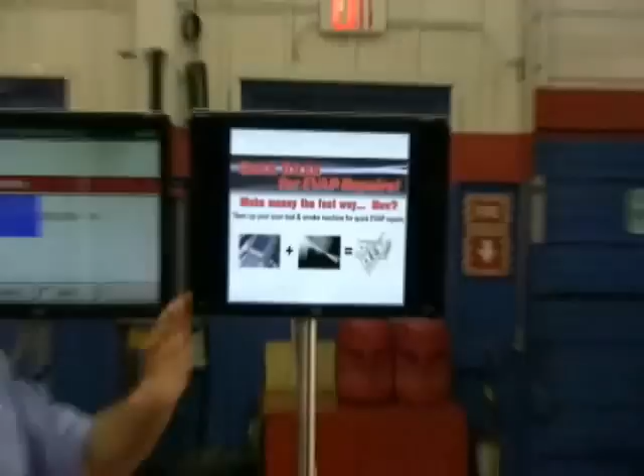Anyway, let's move on here to quick tricks for Evap repairs. Make money the fast way, and now team up with your scan tool. So what we're really looking at tonight, John, right, is using a scan tool. No matter what scan tool. We have a couple picked out here tonight, but it doesn't matter what brand you have, as long as it has bi-directional control. Absolutely. Right?

Absolutely. And what bi-directional control, John, would you be looking for in this Evap? Give us some examples. Well, vent valve control, purge valve control, maybe some service bay tests or leak monitor tests, whatever the scan tool's terminology is. Okay. Bi-directional control, so we can actually control the system and then we can watch system pressures with our smoke machines. We can do a lot of things to better diagnose the systems quicker and more accurately.

Good. So basically your scan tool, when he says purge valve, the purge valve is normally what? Closed, right? That means it has vacuum going to it and the computer is going to ground that solenoid to let vacuum through and then suck out those hydrocarbons, right? The vent valve, he said. Now your scan tool needs this control. It's a lot easier, okay?

Scan tool needing the control, the vent valve is normally open. When it's normally open, meaning if you smoke it, hello, you're going to have a whole bunch of smoke coming out the back. This is not a Bond party, right? So we don't need all the smoke coming out the back. We need to shut the valve off, and we could do a test.

The bay test. The bay test is specific to GM vehicles. Great to run that monitor, isn't it? Absolutely. It's a quick way to run the test, reset the monitor, and find out if you've got a system that seals or if you have a problem. That's right. Now, sometimes the bay test times out, doesn't it?

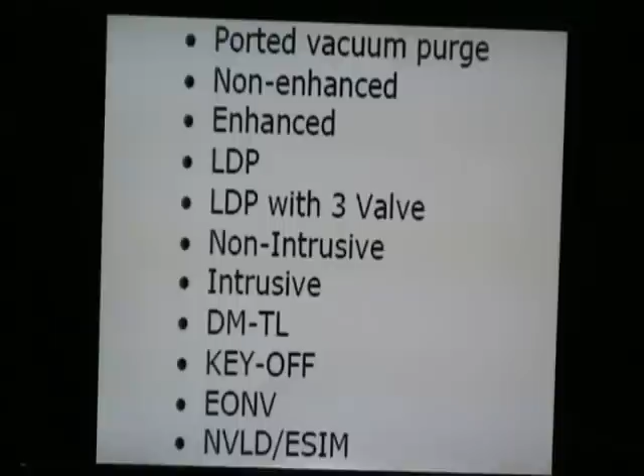So really, the key here, the quick trick, is to test the system, not the vehicle. If you know what that system is on that vehicle, and you know the similarities between these systems and what makes them different, then when you approach that vehicle, you already know what to expect. When you know what to expect, you know what to inspect. Very good. Now that brings up a good point.

So in other words, you could go back to the old ported vacuum days of when Evap would suck stuff out, and you know what? All of the cars that used the solenoid were very similar to the thermostatic vacuum switches or ported vacuum switches of the day. And then you hear this word non-enhanced or enhanced Evap.

Like John said, if you really understand the system, a leak detection pump could be in a Chrysler. Sure. We'll be talking about that tonight. Could be an Audi. Could be in a BMW. Volkswagen. Depends on the car, right? If you understand how the system works, you don't look by the car brand. You look by the system that you identify.

Exactly. And as with the case with this Jeep, there's an LDP and an LDP with a 3-valve. This particular vehicle does have the LDP with the 3-valve system. These are probably the most misunderstood Evap systems that we work on. So we're going to spend some time on that tonight, explaining how some of the components inside of the leak detection pump work, and how to quickly test them using your scan tool and your smoke machine together.

And see, that's a key point. When you can just sit in the seat of the car, get paid for your diagnostics, and get paid to do it right and do it easily, that's how you make money. Absolutely. So the two tools we're concentrating on tonight are the scan tool and, of course, the smoke machine. Let's move on from there.

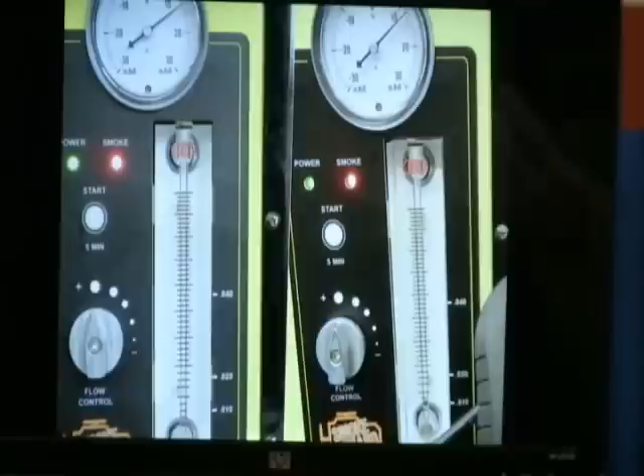So do we have a real leak code? Our computer, our scan tool says we do. But we want to qualify that. We want to make sure by using our high resolution flow meter that we can see we have a leak through the system. We'll seal the system up. We'll look for a flow. If that flow ball doesn't drop to the bottom, then we know we've got a leak.

We quantify the amount of the leak by seeing where it is, exactly how much flow is going through that system. 2000 and newer, anything over .020 flow through the system is enough to turn on the check engine light. 99 and older, anything .040 and more. Right. So your flow meters are indexed, or you've got ways to monitor that level.

The other thing, John, not to interrupt you, but what I always notice when I see guys use the smoke machine, this meter here, they don't have a clue what to really use it for. Right. And this is a key, guys and gals, that this meter gets looked at. Now, could we give them a live demo of what I always do in the class? Yeah, absolutely. Let's go over. Craig, follow us over with the camera.

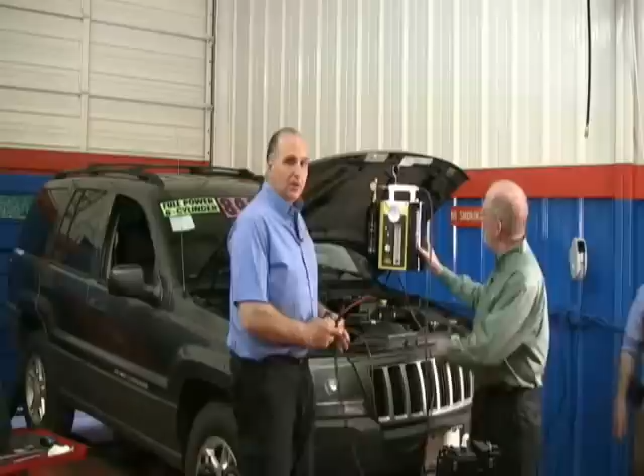We've got the machine hooked up, ready to go. You can see the ball is all the way at the top. Can they see that real good, Craig? You can see we got smoke coming out. You can see our gauge, inches of water. Okay. Now, watch when there's a restriction.

Oh, yeah, it does not make it better. You try. It doesn't make it better. He's giving me the no signal from behind the camera.

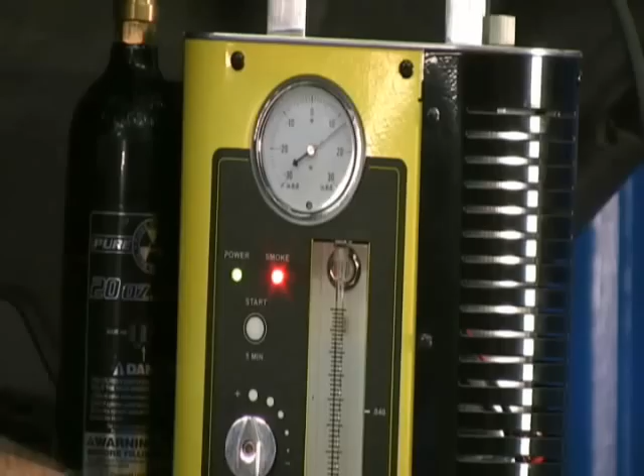Now, look what happens. Where's the ball? So if you have a restriction, you hook this up, and you're not getting anything coming out, first of all, I would say baseline your equipment. Am I getting it? Is my ball up top? How many times your hose may be crimped, or God knows what happened. Maybe moisture in the line, right? Or you have a leak somewhere inside.

Okay, so that's a quickie. Let's shut this off before it gets smoked out. The other thing we can do while we're at it is you want to make sure that you've got a flow meter, or excuse me, a pressure gauge that you can adjust to zero.

Because when we get onto some of the natural vacuum type systems, the switches actually operate at about -1 inch of water column. So when you're talking about go or no go at -1 inch, you want to make sure that your machine can be zeroed. So right there's just a little Phillips adjustment screw that you can go in and re-zero that as well.

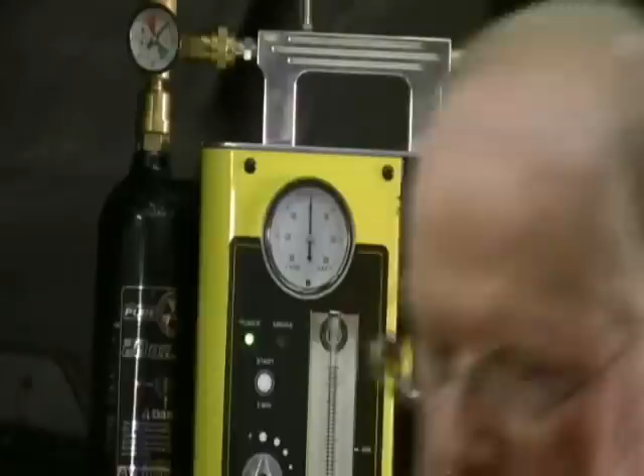So talking about qualifying your machine, you can make sure that you have full flow. Yeah, now we got plus and minus. Some don't have gauges like that. Okay, I know, adjustable. After years of use, mine was out of calibration, and I had to do exactly what John showed you. Just a minor little tweak. It costs a little bit more to have a gauge that you can adjust, but it'll save you a lot of days. And in natural vacuum leak detection, if you're not reading correctly, you'll see that.

I'm getting ahead of myself a little bit, but one of the things that happens is with your scan tool, it'll tell you whether the switch is open or closed, but it doesn't tell you at what pressure or vacuum it's opening or closing. Exactly. You can use the pressure gauge on your smoke machine to monitor the system pressure and see what pressure it operates at. So it's important that you have that accurate. Excellent. So that's what we're talking about when we talk about qualifying the code and quantifying the leak size.

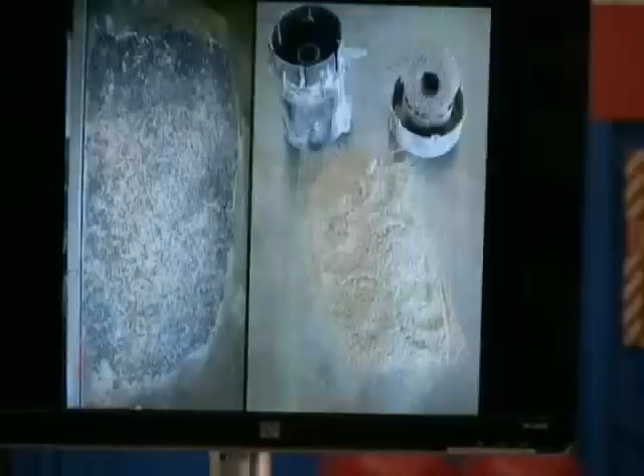Okay? Very good. Let's go back over. Any questions so far? Okay, let's move on. You caught me in a sip. That's all right. I got the button here too. Oh, okay. Take us back one.

All right. Talking about restrictions, one of the things that happens is that when we first hook up our smoke machine, we want to see that it does flow the way we saw when G had it running over here. Oftentimes we see this, obviously a contaminated filter and canister, and these types of restrictions can cause false leak codes, can't they? Oh, no doubt. Because if the system can't get air in and out and draw the hydrocarbons out of the canister, when it does a purge seal test, if it doesn't see a change in pressure or switch positions, it's going to flag a code.

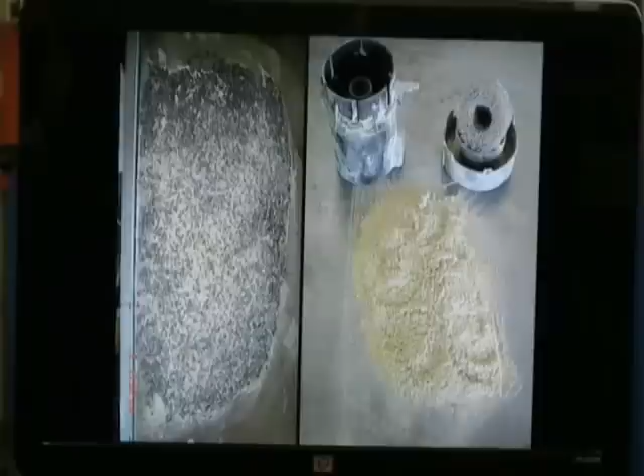And so we go back to what we were talking about earlier. My computer's telling me that I've got a code, but when I test it with my smoke machine, I see no flow. What's going on? How can that be? Well, one of the things you want to be aware of is the restriction factor. Right, and where these things are low-hanging fruit on a vehicle, it's easy for mud and dirt, sometimes insects and so on, to get in and clog these things up. Here, looks like someone went four-wheeling. Yeah, that's a little bit of dirt there, isn't it? Little Baja.

So what happens, it's very simple, guys. When you use your flow meter, you want a high-resolution flow meter so you can see the flow through the system. When you hook it up with the scan tool connected and the system in its normal state, that's with the back door open on an enhanced system, then you should get flow through the system. Sure. So if that thing's not all the way up and nothing's coming out the back, you got a clog somewhere. Exactly. That ball might drop real fast. The quick trick is, using the scan tool, I can watch my fuel tank pressure sensor, and I can see if the pressure starts to come up.

So that FTP PID, fuel tank pressure sensor PID, is a very important PID to look at, isn't it? Absolutely, especially when you're creating pressure with your smoke machine, because you can actually check the range of the FTP PID, but you can also see if the system is restricted. Here's another thing, G. What if I hook up my smoke machine and the ball drops to the bottom and I get no smoke flowing through the system at all, but my fuel tank pressure sensor doesn't show any increase? Then I know that my restriction is upstream or towards the purge side of the system.

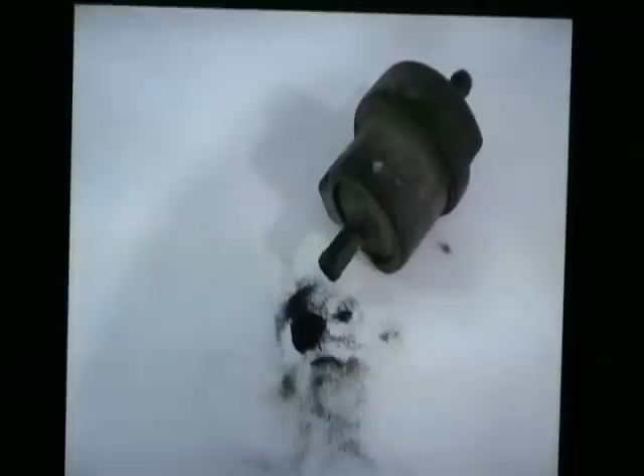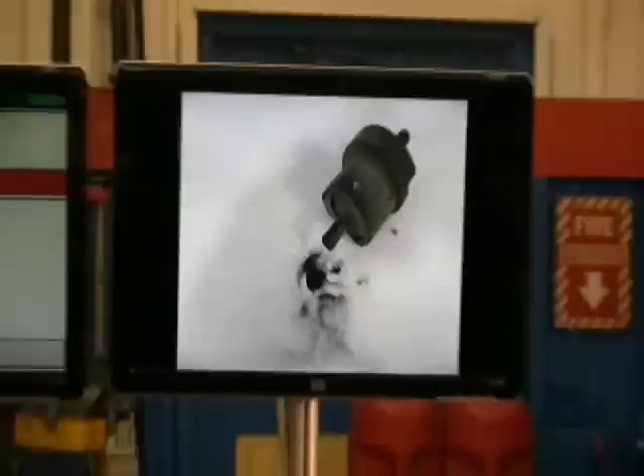We'll do this here in a little bit. One of the things that happens also is when we get into systems that, we'll take, for example, a purge valve here. This is a purge valve that came off of a vehicle, and the reason that we'll talk about this is because a lot of guys don't think about the purge valve. It's normally closed, right? So I don't really expect anything going on up there, but what if I don't get vacuum into the system? Would that cause a false code? Sure. Because again, the switch isn't changing position, is it?

And what about the fuel tank pressure sensor? Does it change when there's nothing coming in? When you see stuff like this, guys, that charcoal canister's come apart, and it's going to constantly mess up whatever new valve you put in. You get the one from the blue guy, the yellow guy, one stinks, one sucks, whatever, guess what? You need to look at yourself. You are making a mistake because you need to flush everything out.

Now, this is a great trick, and probably if you're old like me, you have some of these, although my son threw out a bunch of these that I had. Why don't you show them that, John? Well, basically, what we're talking about here is you get a system like this where maybe the canister has been driving down the road, and we've got a whole bunch of canisters cut apart here. You can see these filters, and actually this one here has some springs in it to help cushion and keep the charcoal compressed.

But this shaker box is rolling down the road, right? Especially on pickups. And your teeth are rattling, so you know what this is going through. Oh, why change the struts or the shocks? Yeah, who needs that? So what happens is we've got all these canisters cut apart so you can see what's inside of them. Well, that charcoal breaks down, just like anything else. You rumble it enough, pretty soon it's going to break down. And when it goes into purge mode, it's pulling what? Pulling that vacuum. All that vacuum through with all the fine dust.

That fine dust is what we have up on the screen. So that fine dust could be a problem. Absolutely. And if you change that purge valve and you don't make sure it's clean, even if you did change the canister, it's going to go bad again immediately. And it wasn't the fault of the valve. Well, and the thing is that we also want to make sure that if we do see this kind of action going on at the purge valve, we want to take a darn close look at that canister, don't we?

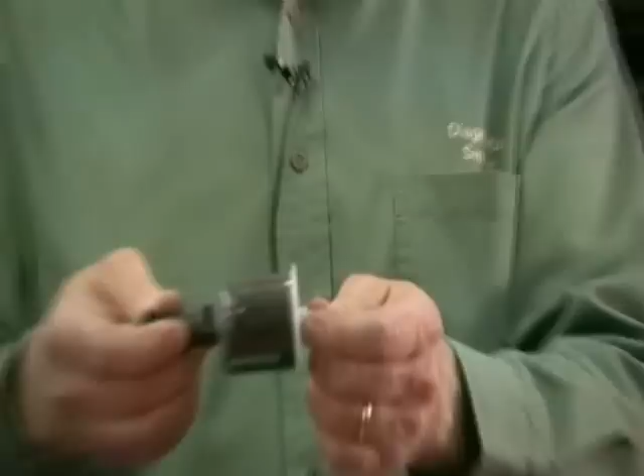These are typically about a 10 micron fuel filter, and this becomes your eye into the system, really. Because what happens here is, if this is in series on the purge line, everything that comes up from the canister is going to go right through this before it goes into that purge valve, isn't it?

I love this. We used to use these on carbureted vehicles, and you can see all that charcoal in there. By the way, if your auto parts store doesn't have these anymore, a lawnmower shop probably will, because they still use this type of fuel filter. We used to use this on carbureted vehicles, a long time ago.

Think about this evap system like when you have a clog in the air conditioning system. If you don't put some sort of filter in, what's going to happen? You're going to mess up that new compressor you just put in.

So just a quick trick is to go ahead and put a little safety insurance in the line. If you use a clear one like this, it's also easy to show the customer: hey, we put this in line, we still have a problem here. I highly recommend the clear one. There's nothing like show and tell.

When you say, hey, it was clean in the beginning, maybe you can take a digital picture, and then when they come back, it's like this, you need to change it. And they may need to change it 3-4 times, depending on how good the system is and how long they drove the vehicle with this shaker box breaking down. Remember, you got sucking going on, you got stuff going on, right?

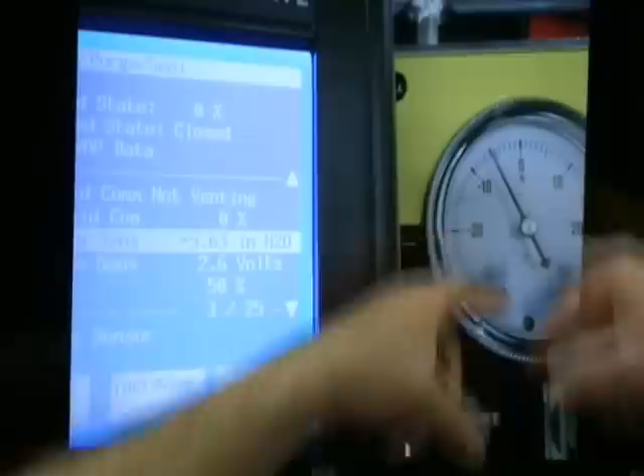While we've got our scan tool and this kind of goes back to the previous question - while we have our scan tool connected and our smoke machine connected, it is a good time to validate the fuel tank pressure sensor. In this case, we're in the purge seal mode, and we can see we've got minus 5.63 inches of water column, and on the gauge we're showing about minus 5.5 inches of water column. Now that is a real good one to do.

Now again, if you don't have a gauge on there, how do you know the scan tool is correct? So when you're using the PID, this happens to be a factory GM tool here, the Tech 2, but you can see that this matches up. So scan data sometimes is not 100% accurate. Sometimes there's false information in there. This is a way of verifying that, in fact, it's good, right?

Absolutely. Fuel tank pressure sensors are kind of like strain gauges, like the old MAP sensors that we used to have back in the 80s. When they start to drift and go out of calibration, they can start giving false readings to the computer and all kinds of crazy things happen. So this is a quick way to validate, and it takes you another step further.

A lot of your procedures will say to check the voltage at rest - in other words, no pressure on the system. So you get a neutral voltage, and it's within that spec, so I guess it's as good as it gets, right? Well, actually, if you use your smoke machine, you can use it to put positive pressure on the system, then use your purge solenoid test to draw it into a negative state. Now I can see the whole range of that - I can see it from minus.

So opening and closing. Absolutely. You open that purge valve, we're going to start sucking down, aren't we? Yeah, so pressure's going to drop. You then can see that it's actually working. So we can do all of this, and really, we've gathered all this information, and we've only been on the car. We haven't even got out of the driver's seat, not even cracking the hood yet. We've got under the hood to get to, but we haven't really jumped into it very far.

One other thing we want to be aware of is that when we are checking the Evap system, there's always a possibility of a rollover valve being closed because of the pressure that any smoke machine is going to make - that can in some cases close the rollover valve. Let me stop you there in case people don't know what a rollover valve is, because not everyone does. A rollover valve's job is to prevent gas from coming out in case the car is in an accident. Now, another thing it does - if we have a machine that we're putting pressure in, some of these are very sensitive and could possibly close off this filler neck, couldn't it? Absolutely.

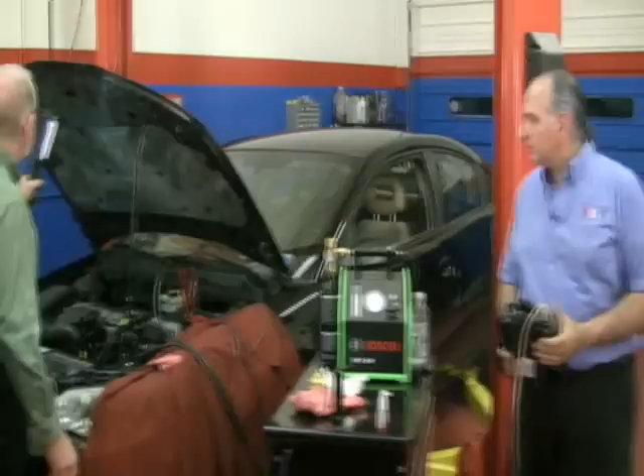What we want to do next is move over to this Saturn and go ahead and do a couple of tests on the car, just to show you what we've been talking about here. We want to go through this real quick because it's something we can do quick and easy.

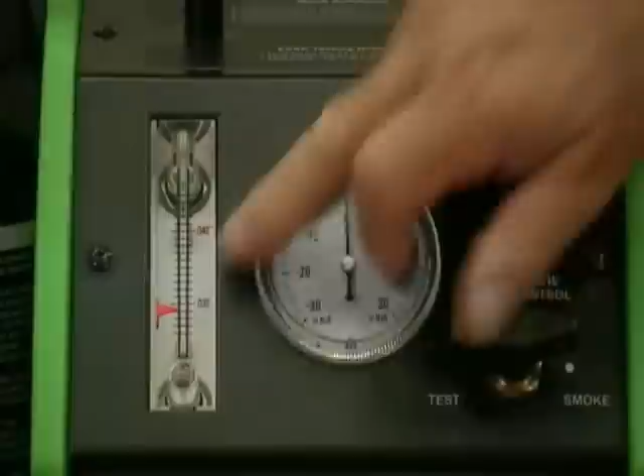Basically, the system right now is at rest. The thing we're going to do is simply turn on our smoke machine. Pressure, look at that, we have flow, don't we? Look at the ball, full flow all the way to the top. If I shut it off, watch it - watch the gauge, watch the ball. Ball drops, gauge goes to zero. Back on. So what's this telling us? We're getting flow coming out of this, aren't we?

What happens if I have a restriction? Oh John, look at that, my ball's at the bottom. And you notice that the system pressure shown by the gauge has gone up. Right, absolutely. So now I've got flow back into the system. So the first thing, as we talked about earlier, the flow meter is very important, so we can quickly go in and take a look at what's going on.

The next thing we want to do, as we already discussed, is if we see a problem here - if we see flow being restricted - what would we want to do, Gene? We'd want to bring up...

We're going to use the OTC Genesis Evo here. I'm just going to hit reuse, go back to that Saturn, save a little time here. And as this is going into the car, is the key on? Keys on, okay, so the key is on. Nice when you have helpers, saves me from going over there.

So now we've got to wait, just like everything. Remember, when you're doing stuff live, it takes time. Okay, so we're actually doing this test like you would do in your shop. You want to take a question in the meantime? Sure. But we'll take a question.

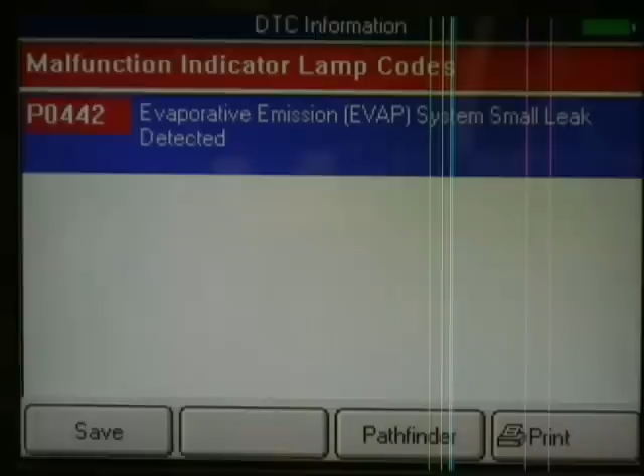Now, we have this on. We're going to go in first and look at trouble codes. I'm not going to scan the whole car, but I want to look at trouble codes. I went into the MIL code first. Let's see what comes up. We got a 442, small leak. This is the one that kills a lot of you guys, a small leak, right? Absolutely, it's tough. Well, we're going to show you how it could be a lot easier. Now, you're not done yet.

I want to go into history codes or failure records. Failure records are something that's recorded in GM. If you're on a Tech 2, it'll do it. If you're in generic OBD2, you'll have freeze frames. Some car companies give you more than one freeze frame. Here we're going to look at failure records. Again, live takes time. But once this comes up, we can verify when it happened, and is there anything else associated with it?

Well, Todd Erickson says intermittent has a pattern, random does not. That's a very good tip, a quick tip. Todd says intermittent has a pattern, and random does not.

Okay, so look at this, two failure records. So it failed twice for 442. Let's just look at a record to see what it is. Sometimes you'll come up with a different code as well. These take a little time, especially the way the scan tool is hooked up to a monitor. And guys, when you're on a car with your scan tool, be patient and stop pressing buttons, because sometimes it does take a bit.

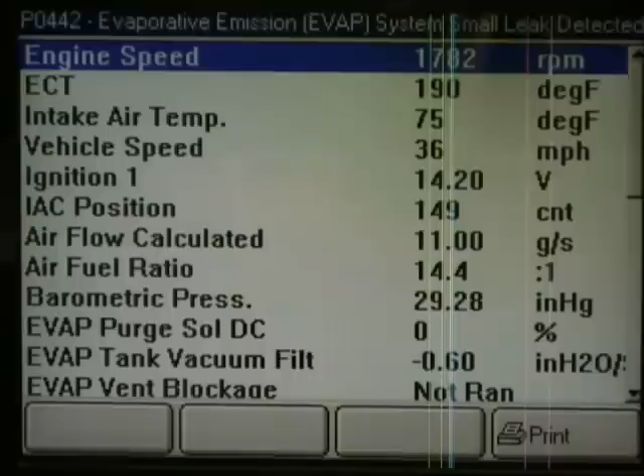Fuel level. Hey, that could be important the next time, because as we said before, look at the fuel level. Maybe if it was a full tank, we know you can't do it. And maybe if the tank was too low, you can't do it. And maybe if it was a half a tank, you couldn't do it on certain vehicles. And maybe the leak is under the level where the fuel is when the tank's 34% full.

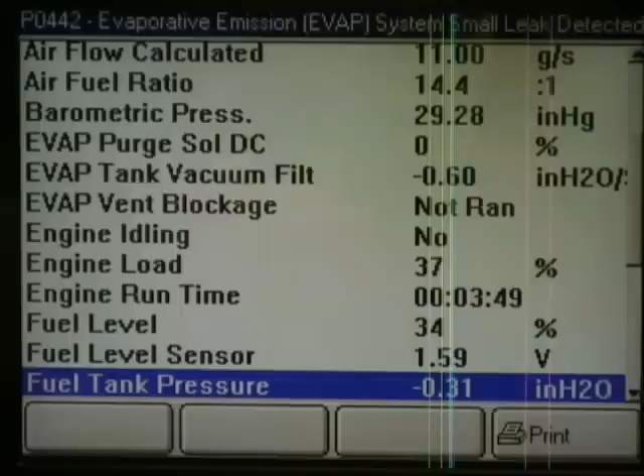Or maybe there's no leak at all and that fuel level sensor is not moving. Right. Could be it. And it's messing with the computer strategy. Could be another false leak code, couldn't it? So let's see if we have any other questions there, Craig, while I go take one more look at a history thing here.

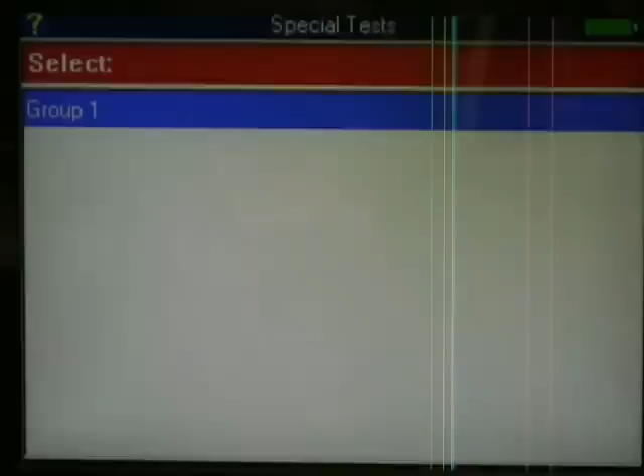Now a little tip. On newer vehicles, 2010 and up, late 2010, so 2011 on a lot of them, in generic global OBD2, we now have mode 8. Mode 8 allows you to close the vent solenoid. The EPA knows some of the top 10 codes, a couple of them are always Evap. So what did they do? They mandated a rule to scan tool manufacturers to put in close that vent valve. That's mode 8 in your generic scan tool. Try it when you get a chance. But for now, we'll do the real thing. Let's put that back on.

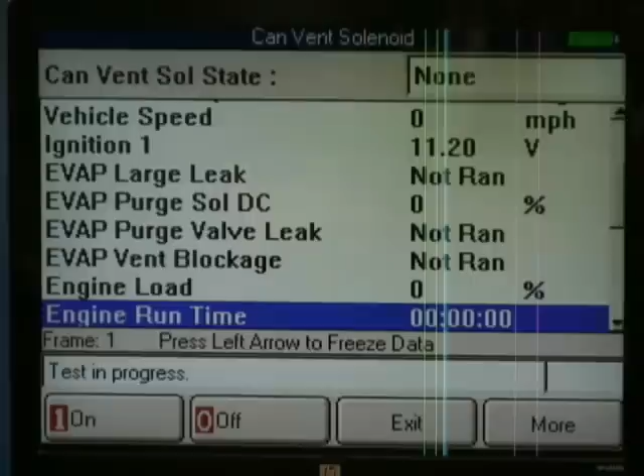Okay, turn on the smoke machine, get the flow going. All right. So go ahead and close the vent valve. And here we go. Now open this data link. I'm going to hit my start here. Wait for some data to come in. Let's see what comes up on the PIDs. Okay. And I'm going to click start. And I'm going to put the test on. Watch the ball. Okay, ball's way at the top. Way at the top.

Is there any chance we can get a fuel tank pressure sensor display up there, Gene, while we're doing this? Is that... no, I mean, as far as on the... Oh, the scan tool. Yeah, the scan tool. Let me see. There we go. Pressure, fuel tank pressure sensor. Okay. So right here, you just give it a second to come up.

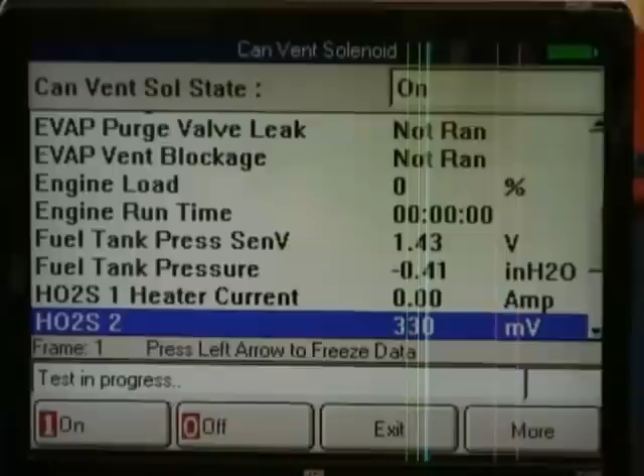Fuel tank pressure, 1.43 volts. Fuel tank pressure in inches of water, a negative 0.41. As you can see, we're putting about maybe 5 inches of water column pressure on the system. So really, our fuel tank pressure sensor is not really showing us a whole lot, is it? So again, real important. Craig, zoom over here, just so we can see that we're putting this pressure into the system, but we're not reading that there, are we?

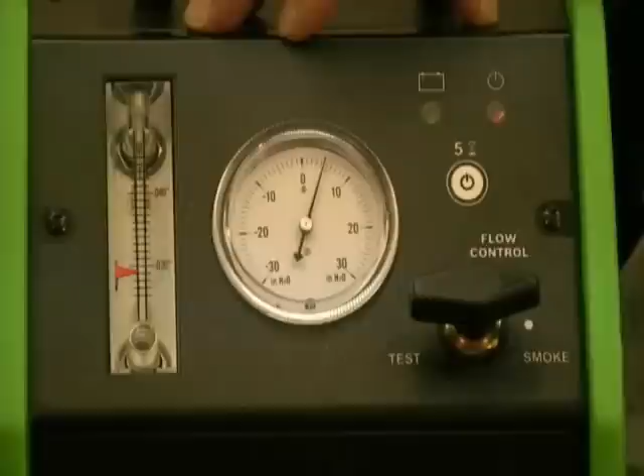Right, we've got the back door closed, right? Back door is closed. So what's that going to tell you? Do I look for a leak or do I look for a fuel tank pressure sensor? Maybe a restriction on this side of the fuel tank pressure sensor. Exactly. So here's the fuel tank pressure sensor in the back of the car, right? So it can't be back there. It's got to be before it. So we can have anything prior to that.

I don't see any smoke here. No. Do we have any smoke anywhere up here? Take a light and look underneath. Because it could be a leak... It's getting a little smoky back there. Could be a leak in front of the... Oh, I see smoke. Yeah, it's up in front of the... I don't know if you can get down there, Craig, with that. There is smoke coming out here.

Oh, just look up here. There we go. We see it. You see it coming out? Yeah. And that's not the vent valve. Now watch. I shut that vent valve down. This appears to be a pipe, actually. I'm gonna turn this off.

And we still see smoke coming out, right? Yeah, there's smoke. I'm gonna reopen the link. And by the way, if I shut this off, then we know it's not holding any of that. And that's the next thing. If I was able to keep this up when I shut it off, I would have some sort of seal going on somewhere.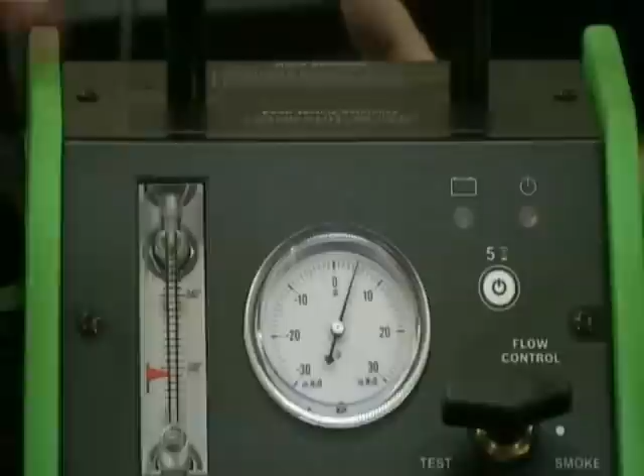If the pressure stays up, of course we'd have to have the vent valve closed, but if the pressure would have stayed up and slowly bled off, then we would see, okay, I've got a small leak. So you turn that off, there you go. And you gotta maybe let it bleed out a little bit more there. So that'd be a small leak. A fast leak would be something more like, boom, right off. So that's a fast leak.

A small leak is something, a lot of times, like if you said it's a line, in some of these GM cars the lines rust. When they pit, and sometimes you go over a bump or some vibration, a little piece of rust falls off, the leak gets worse. Then who knows, it flexes a little bit, clogs up a bit. Small leaks are tough.

By the way, on a small leak, especially if it's over a tank or something like that, if your shop has the doors open, the fans on, you may never see that smoke. It may blow away in such small quantities that you can't see it. You may have to close the bay door to see where the smoke is. And Bob, turn off the air gun. Yeah, that's the other thing.

So here we got bi-directional control. Let's cycle that vent valve a few times while we're at it here. There we go, on. Get some flow going. Off. Just show the guys how easy that is. On and off. On, off. You can see the state up top. On, off. Cycle that a few times.

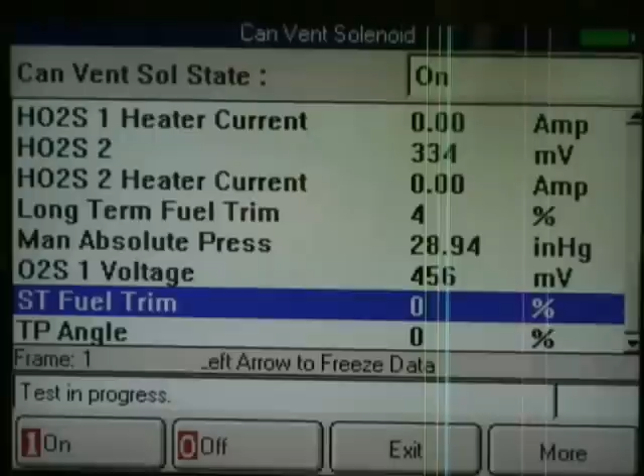Watch that flow meter ball, because maybe it seals all of a sudden. Maybe there was some contamination in there, it flushes on through the system, and all of a sudden it starts to seal. Then I know right away I'm definitely dealing with an intermittent, and I know it's a vent valve, because that's what I'm working with. I could do the same thing with the purge valve, couldn't I? You bet. Same exact thing with the purge valve.

And if you graph this on the scan tool, you can see a line going up and down, which is sometimes easier on the eye. Maybe you're not going to remember the 1.43, but if you saw the line was straight and it didn't go up or down, nothing happened. It's not a question of, oh, I forgot to write that number down. We just didn't see anything. Absolutely.

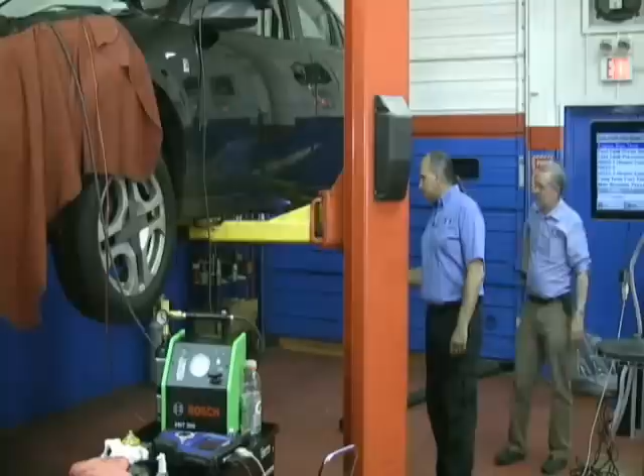So we'll disconnect this. A little clear. I'm not sure that they've seen anything. Now we go. So put this up, we got our smoke machine on. I got it. Put up the black light. While we're putting this up, there's still smoke coming out. Oh, you already turned it on again. You see that smoke, right?

Actually, it's pretty bad. And now, it's a rotted line. You can't see it from your camera angle, but it is the line where it's in a clamp. So you know, it's the classic rusty mess, salt or whatever got in there and it rotted it. Hang on here, it looks like someone used duct tape, a mechanic's best friend. Wow. Seriously, look. They tried to duct tape an evap line.

Look, is that what that is? Oh, yeah, yeah, yeah. In fact, I can see it bubbling out of there. There it is. Oh, that's a good one. And, yeah, look at that. Wow. Smoke everywhere. That is no small leak.

You know the nice thing is, the fluorescent dye will mark that, so when you take that out for your customer, and you have a trusty little black light, you'll be able to actually show them that, hey, that line was indeed leaking. Now, by the way, that dye does not light up the smoke for you. It leaves a stain after the fact, so you can find the leak.

So don't expect to shine the black light up while the smoke's coming out and say, oh, what colors. No. Too little dye in each little bit of smoke. It accumulates.

Absolutely. Okay, do we have questions? Yes, since the smoke machine is under pressure, do you expect the pressure to affect the reading of the FTP sensor? If it does, can this cause a problem when troubleshooting evap problems? Actually, we want to see the increase from the pressure gauge on the smoke machine as we're putting pressure in the system. That tells us the fuel tank pressure sensor is reading properly. So actually, that's a very good test. And as we mentioned earlier, on the positive and the negative side of the sensor, check it both directions.

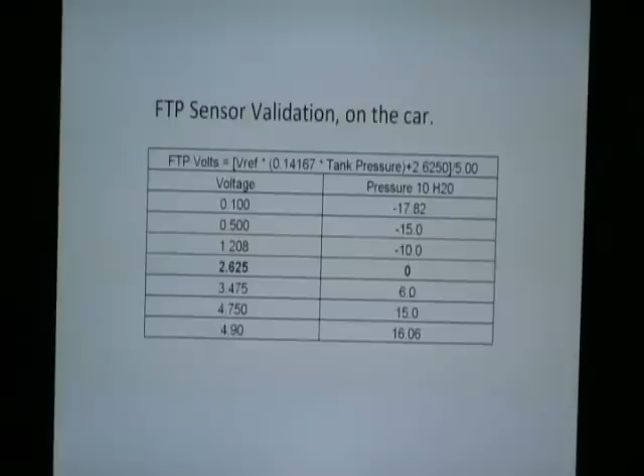Okay, so let's move on to our next setup. Where's our button at? And here we go. Okay, let's talk about this neat FTP sensor validation chart. In your downloads, you have the FTP sensor validation chart. This particular one's for Ford, but there's a few different car manufacturers. Sometimes this information is hard to find, so we put some of those in your download package so that you'll have some reference. For instance, Ford, their resting voltage is 2.625 volts. GM 1.5, and there might be some ranges.

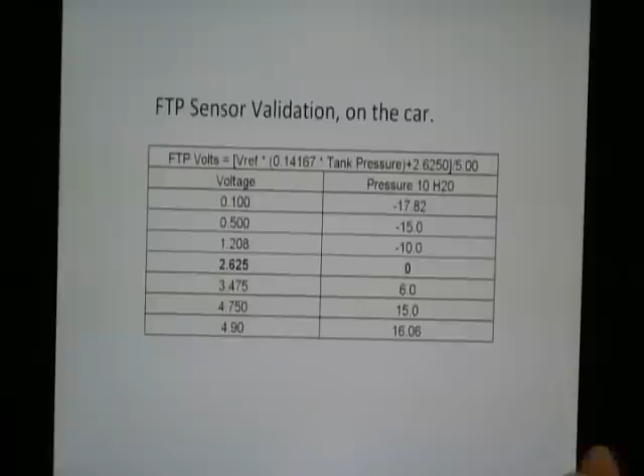The idea that we want you to gather here, and a quick tip, is that you can actually look at this. For instance, on this Ford, it'll read from minus 17.8 inches of water column to 16.06 inches of water column. GM, I think you'll see top out about 6 or 7 inches of water column, and it'll go down. So at least this is a good chart to give us some reference. Exactly, and be aware, because it's not just power. Once we know that there is a range and certain values that should be achieved, we can test it very quickly, very easily. Very good.

So now let's do the LDP. How about we talk about the leak detection pump? Let's get that in. We've got a leak detection pump here that we've got cut apart. Before we get into testing the leak detection pump system, we want to talk a little bit about the leak detection pump. This is probably the most misunderstood part of the most misunderstood system out there. Somewhere I got a screwdriver so I can keep my hands out of the way here. But basically, the leak detection pump is essentially two very essential components.

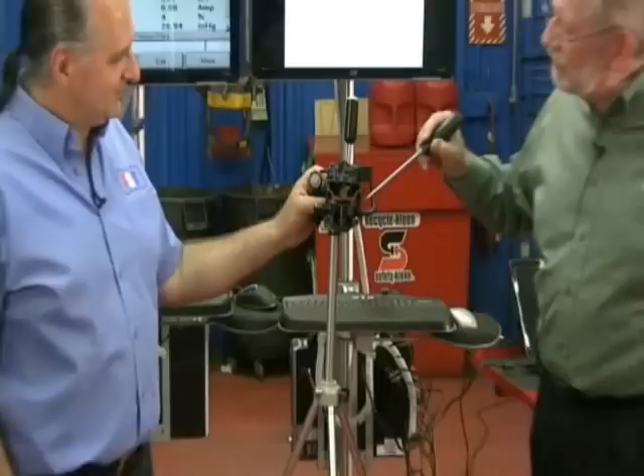The vent valve is down here in the bottom, and as you can see, it's normally closed here. Or excuse me, open. Normally open vent. He wanted to see if I was sleeping. That's right. So what happens is we also can create a slight amount of system pressure with the leak detection pump. That's what it does. It's only there to test the system integrity.

In the leak detection pump, if you've downloaded your package, there's a cutaway view in there of your leak detection pump. And so what you are looking at is the solenoid on top, right here. We'll just pick this up. We just kind of broke one apart to show you. This is the solenoid, and the solenoid is controlled by the PCM, and inside the solenoid, there's this little shuttle valve. I'll try to show this. I don't know if you can see this or not.

But this is a little shuttle valve that shuttles back and forth, and it's right up here in the top and controlled by the solenoid. So that shuttle valve runs back and forth, and what's it going to do? It's going to direct either manifold vacuum or atmosphere. Manifold vacuum comes in over on this side.

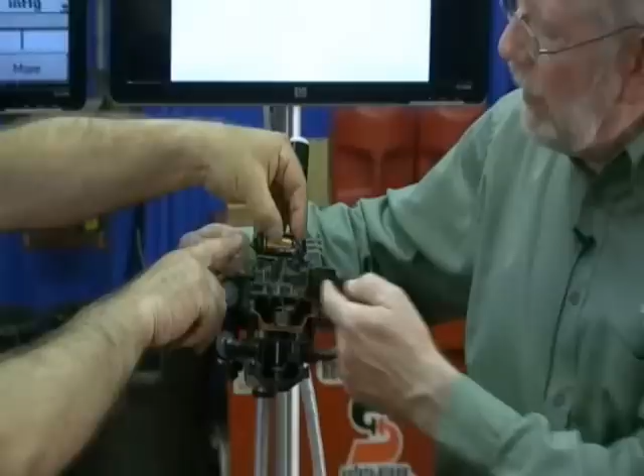Atmosphere comes over on this side. So that shuttle valve going back and forth can either apply vacuum to this chamber or apply atmosphere to this chamber. Correct. Looks like a little needle in the seat from a carburetor, right? Very similar, absolutely. So when the vacuum is applied, what happens?

Vacuum overrides the spring tension and the diaphragm is drawn up. When the diaphragm goes up, you'll notice there's another component in this diaphragm. Here's the diaphragm, and here is the other component I was talking about, this interrupter. And this interrupter goes up with it. So this interrupter runs between the switch and the magnet. So here's the switch, and if you can envision the magnet over here.

This interrupter, when it gets in the up position, when the diaphragm comes up, what's it doing? It's blocking the magnetic lines of force, right? So that switch will go open. When the diaphragm is down, the switch is closed.

So when the pump is actually pumping, this diaphragm is fluttering up here in the top third. It never really goes all the way down. My fingers don't move that fast, but it's doing a good job showing it. You'll see in here, this is not moving.

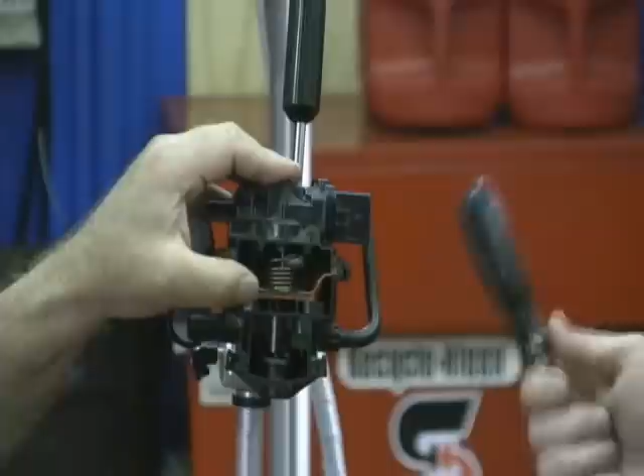What happens when that diaphragm is all the way down, it's actually pushing down and opening the vent valve. And that's its normal position, normally open. So if we're going to test a leak detection pump system, what do we need to do?

Close the vent valve. No doubt. So we'll show you how to do that using your scan tool in the leak detection pump test. I could also go in and ground the center wire or control the center wire and test it that way as well. But there's a quick, easy way to do it from right the driver's seat, and I can see what's going on. I can monitor the center wire.

And by the way, you have to be very careful about that grounding thing, because that little magnetic reed switch is extremely fine, and power probing it will immediately destroy that leak detection pump. Oh, so I wouldn't want to ground that center wire. You probably would not want to do that, because if you slip and hit the other connector, it's done.

Well, that's why we said we're only using scan tools in this. We're not using jumper wires or common anything else. The mistake is people think that if I ground that center wire, that's it, I can test it. Well, you ground that center wire, you may have bought it, you may have just bought a new one. Well, now you know it's bad anyway. You know for sure that's bad. Yeah, but you'll do the same on the new one you get. You might, yes.

So let's finish up here real quick. There's a couple more components in here. As the diaphragm goes up, manifold vacuum pulls it up. Well, what happens when the diaphragm goes up, the interrupter comes up in between and the switch opens, right? Yep. So then the computer cuts the feed to the solenoid. So the shuttle valve then comes over from the vacuum side, blocks the vacuum side, and opens the atmosphere side.

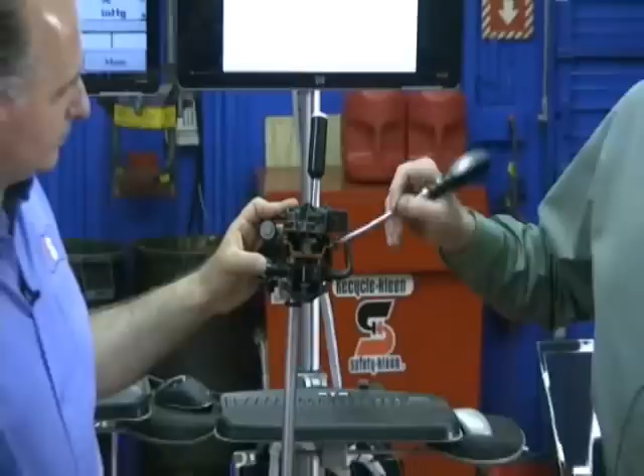So atmosphere comes in here, and now what? Spring tension overrides. Right. And this is about 7 inches of water, right? It's a calibrated spring. Yeah, so the pump will continue to run until it generates about that amount of pressure, and then the diaphragm actually stops.

When the diaphragm goes up, on this side there's a filter and a check valve that only lets air come into the chamber below the diaphragm. And then when the diaphragm flutters down about this far, it'll go ahead and push out over here on the check valve on the outlet side, putting pressure and a small amount of air into the system.

And common failures on these are the diaphragms. Yes, diaphragms can fail, as we pointed out, the switches. And these little valves here could technically leak too. Yeah, these check valves, even though there is a lot of filtration in the system, there's a number of things here that can go bad, isn't it? But there's also a number of things that we can monitor by using our scan tool while we watch the test, and we're going to be showing you that soon.

And we can also, if we pressurize the system when the diaphragm's up and that switch is open, we pressurize that system with smoke, what's going to happen?

It's going to hold that vent valve shut, the diaphragm's going to stay up, and we can go ahead and do our full leak test, start looking for smoke, or we can watch how fast the diaphragm drops down and the switch closes. If you look in here, watch this. See that? As the diaphragm moves, so it's normally open. Can you see that okay, Craig?

Very quick, very simple, that's kind of how the leak detection pump works. And what we wanted to do before we actually show you the test on the vehicle is make sure everybody understands this. It's probably one of the most misunderstood components of any Evap system. Okay, any questions on the leak detection pump, Craig?

Okay, so I guess we move to the car. Yeah, let's go live. Let's come on over here now and let's switch our display. Hopefully we're still awake over here. Everything's still connected.

We had our battery maintainer on there, right? Yep, good. Okay, so we're going to go to leak detection pump test. I'm going to pull this out of the way. And it says the pressurized Evap system and hold for leak selection number 3, hold PSI. So we click OK.

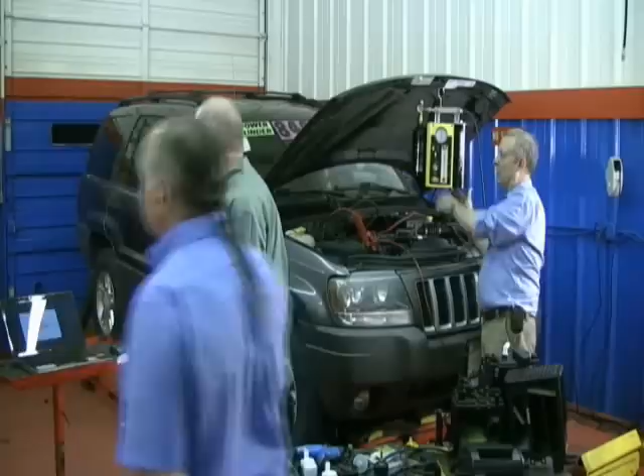So it says engine must be running to perform this test. Okay, we're going to go ahead and start. It may be necessary to remove purge solenoid electrical connector, so they're giving you a warning on the scan tool. What scan tool is this? This is the MaxiDAS. Autel? Autel. All right, okay, the engine's running, so we're just going to click OK.

Now we're establishing vehicle communication again, where sometimes the key's off, you put it back on. Like I said, doing it live with scan tools, doesn't matter what brand you have, they all do take some time. So here, testing, not communicating with control unit. Okay, let's make sure it's switched on. It is, okay.

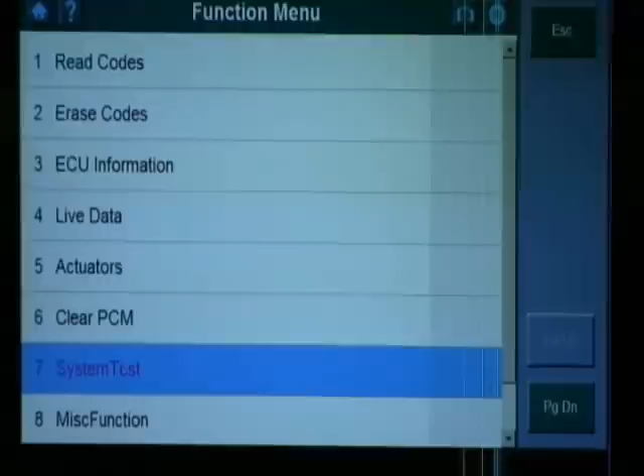Now, even though we did this prior, as you can imagine, everything always works but Murphy's Law. When you're doing it live, something's going to happen. So he's going to go into the system test.

It always feels like 100 years, maybe more. A quick question. Great question.

So if we were at 6.0 on the machine, should the sensor read about 3.475? On the fuel tank pressure sensor? Let's say that one more time. So if we are at 6.0 on the machine, should the sensor read 3.475? Are you talking about voltage? You must be looking at voltage and pressure on the chart. Well, the voltage would be 6 volts, obviously, but if he's looking, I believe he's talking about the pressure on the fuel tank pressure sensor.

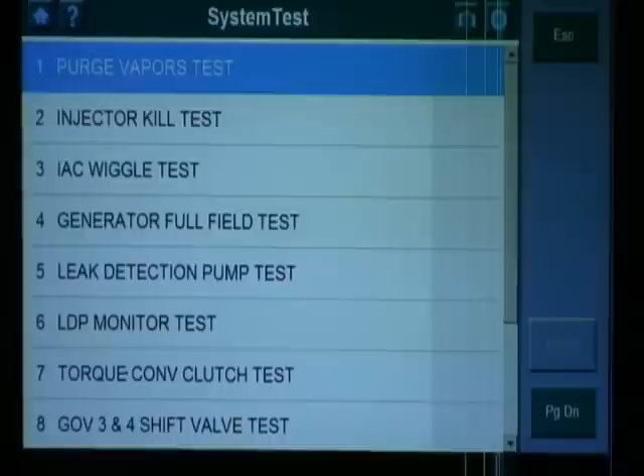It should read the same as what it shows on the pressure gauge. Okay, the voltage, if you're looking at, yeah, there were 6 inches of water and it was 3.475. Yeah, that's correct, I'm sorry. Yeah, that's where I thought it was coming from. Yeah, so that is correct.

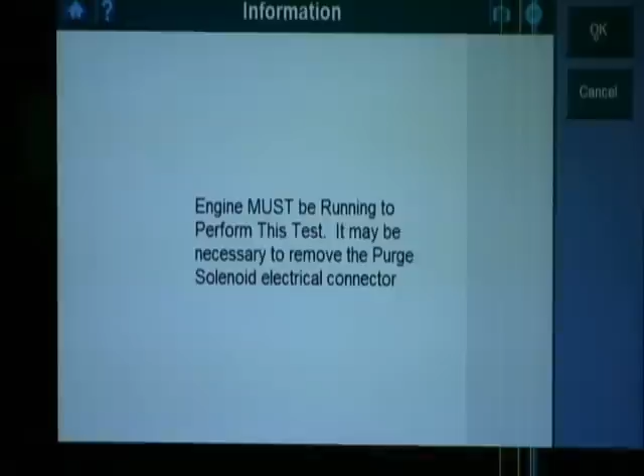Okay, so now we can get back to this and do the leak detection pump test, number 5. Now again, your scan tool has to have this bidirectional ability to do this test, and different manufacturers have different, they may not all have the same tests, or they may not support this. And you may get aggravated like we all do in the real world, it works 1 minute, next minute it don't work. That's why you have multiple scan tools.

Okay, still establishing communication. Any other questions while we're waiting for communication? No other questions?

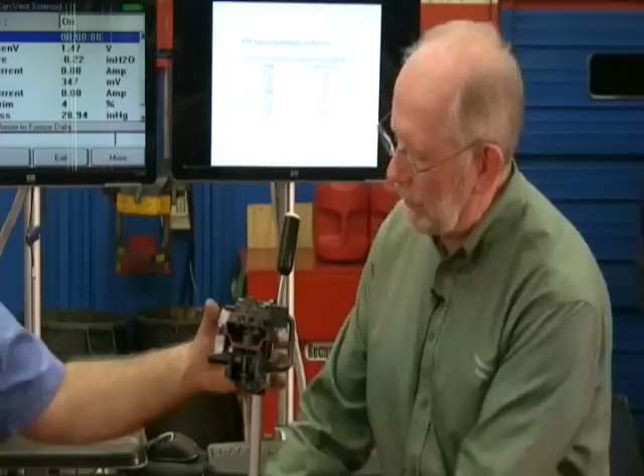What's the best way to leak test a vehicle with LDP? How do you properly close the vent without a scan tool that has bidirectional control? Okay, so the question's being asked: without a scan tool, how do we close the LDP? Well, just to close the vent, we know that if we apply vacuum over here to the atmosphere side... we'll get into that, let me bring this back in here. Not gonna run, but off to the left, right? And this will work sometimes, but you want to be careful as to how much vacuum you apply. Basically, we know when the system's at rest, the diaphragm is down and the vent valve is open, right? The question is, if a scan tool doesn't have bidirectional, what do I do? Yeah, how am I going to get that?

Well, there's a couple of things you could do to test the system. You could actually go through the vent with the back door open, and put smoke into the system, because we're blocked up here going to the manifold vacuum, you could put smoke into the system that way, couldn't you? Sure, but I'm not testing my vent valve, and the vent valve is really what I want to close. I want to make sure it seals, right? So what if I took the line off over here, because I know from what we talked about earlier, the plunger's got blocked off here.

What if I applied about 5 inches of manifold vacuum, from my hand vacuum pump over here, and just pulled that diaphragm up a little way so that it closes the vent valve? Okay, so you can use a hand vacuum pump. Why don't we show them? There's a hand vacuum pump right there. It's going to leak a little.

Big leak. But what you can do is remember that you go to the side that has the electrical connection, and you don't want to put too much vacuum here because you might pull that valve off the seat on that shell valve. So you just want to apply just enough vacuum to lift it. You can watch the switch, but if you're not using a scan tool, you wouldn't be able to see it anyway. So maybe 5-6 inches of manifold vacuum. It's the same thing like EGR, 2 to 3 inches of EGR vacuum, not 20 inches.

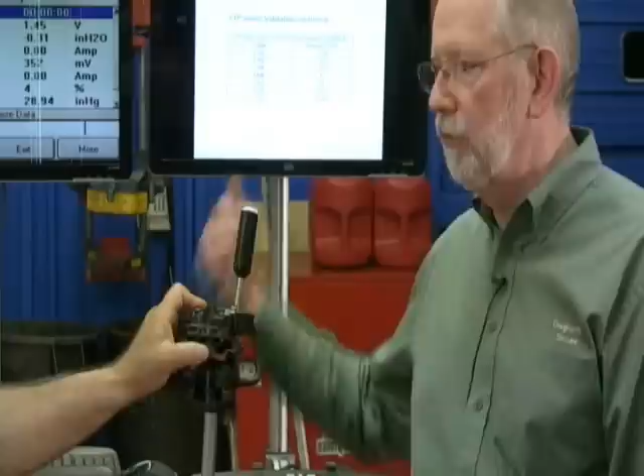Yeah, exactly. Just pull it up just enough to get up off the seat, and that'll close the vent valve, and you can go ahead and apply smoke through the service port as well. That way you're testing the seal and the whole system. You're checking the vent valve and the system. While you reboot this, you can take this away. I'll do Mode 6 on here.

So what I'm going to show you guys is some more information on this vehicle that we have here. Of course, you'll have to be patient and wait. You go down right here, you go into Mode 6. So now you're going to see a bunch of information that I utilize quite a bit that helps me see if something failed. Remember, Mode 6 is before a pending code. A pending code is before the DTC.

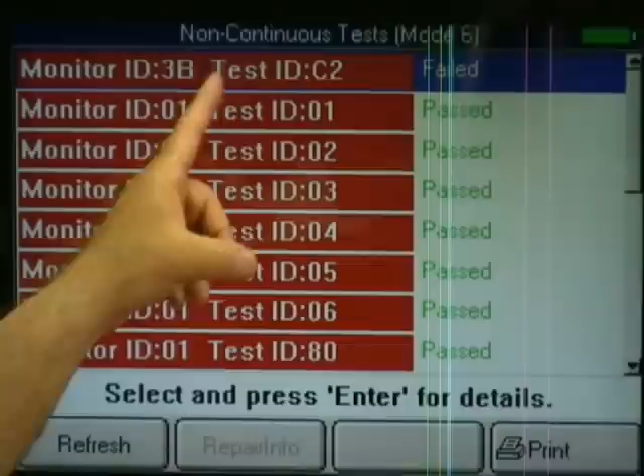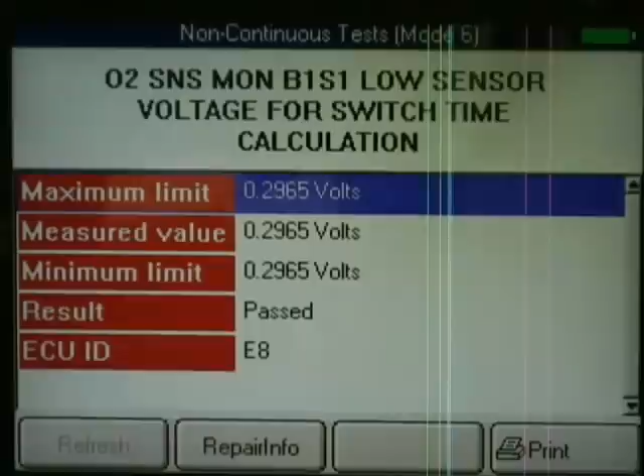So you can see right here I got a fail. You don't know what monitor ID 3B, test ID C2 is, you have no clue. But if you hit enter, it tells me Evap monitor, 0.04 inch Evap test, that we had a fail on this. Now, this one's not allowing me to do a refresh, which I like doing, to give me the latest info. There were a few other ones in here. We don't know what they are until we go down. We don't care about the O2. These are all passes. There are other Evap ones in here.

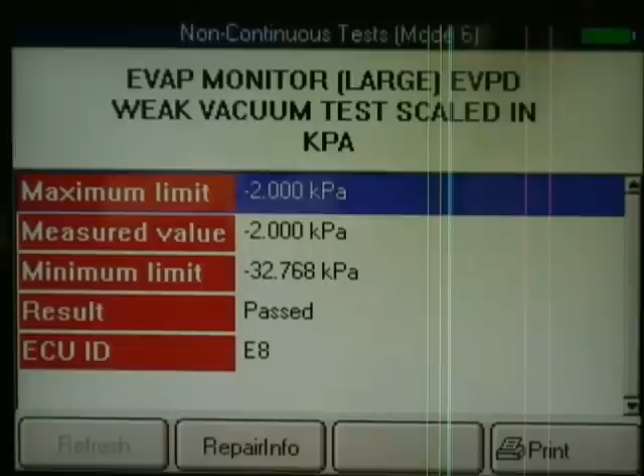The O2 information, obviously, you can use before you change an O2 sensor or a catalytic converter. Here's the cat one. Here's Evap, large weak vacuum test, and it passed. There's a specification in kilopascals that shows whether it actually passed or not. There's another one, large leak. The last time it ran it did pass this and only failed one. But there's a few Evap ones here.

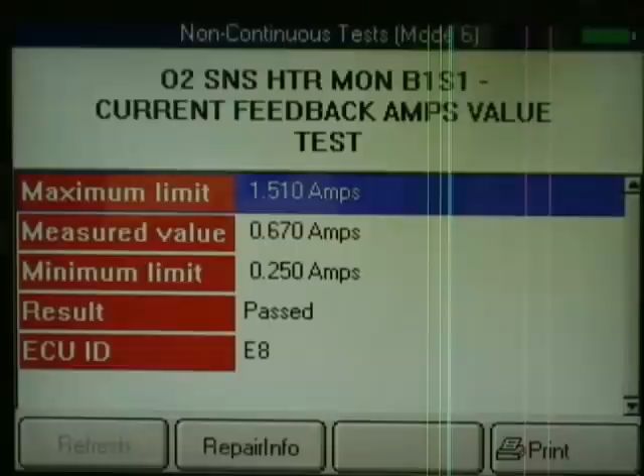Purge, it passed. So we have quite a few. That one, we know it did real good. So there's Mode 6 information that you can easily look at. Let's see if there's any questions on that. Yes, Jeff has a question.

Sometimes, if I can't see the smoke when the vent valve is closed, I use my nose to locate the leak, like a leaking FTPS gasket. Jeff said sometimes when he doesn't see the smoke, he uses his nose to see if he's smelling any fumes, because there was a leak at an FTPS gasket. So yeah, on some cars there are hydrocarbons that are going to come out when you're pushing. That's another reason to use a proper smoke machine.

And we will be able to test the system like that. But how about using an emissions analyzer? We're not talking about any other tools in this particular workshop. There are other ways to check it out in case there's an issue. The thing here was to do a lot of quick, easy stuff with a scan tool.

Don't Evap leaks sometimes make a lean condition on the oxygen sensor? That depends where it is. If the purge valve was stuck open, and the purge is normally closed, right? Everyone remember that? Purge normally closed. If it's sucking fuel vapors all the time, if we had hydrocarbon vapors in the canister, a canister flooded with raw gas, then obviously we would have a rich problem.

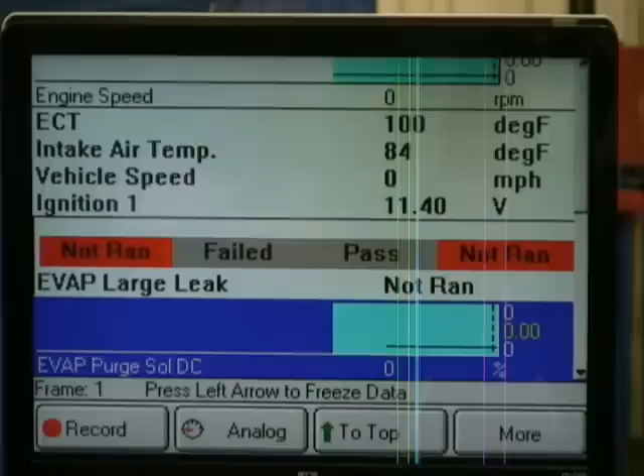Any other questions, Craig? Okay, so let's look at a couple of things here. They're still working on that. If we go into data streams, some of the helpful things I told you before, let's see if we can get some auxiliary emission stuff here. Excuse me one second. Oh, great, here's some good info, and remember I told you graph it? That one's not gonna help us, just pass or fail, but there, evap purge solenoid. I could see that.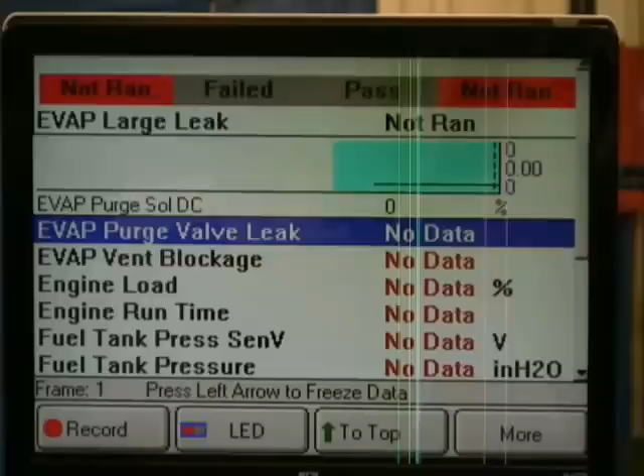So the ones that are blocked, I'm gonna block those out, we don't care about those. Okay, here's a good one. So when you do this and you graph them, we get a line coming across, just like you see up here. You can see the line here. Real important, if you see this thing really going up and down and causing an issue, well, that's that fuel tank pressure sensor, isn't it? And look, we got something going on here.

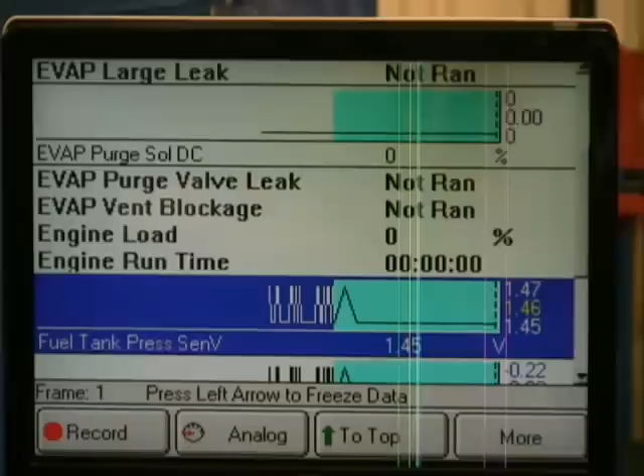Now granted, the scale is from negative 0.22 to negative 0.33, but see how your eye will catch a change in that? It's a lot easier than a change in a number. So we're really not doing much here on this fuel tank pressure stuff. Graph the voltage. So there's the voltage too. We got just a little bit going on, and it's really not going to make a difference. I put the smoke machine on.

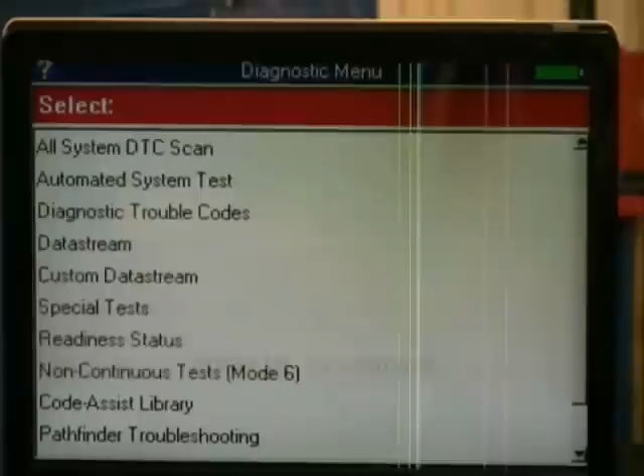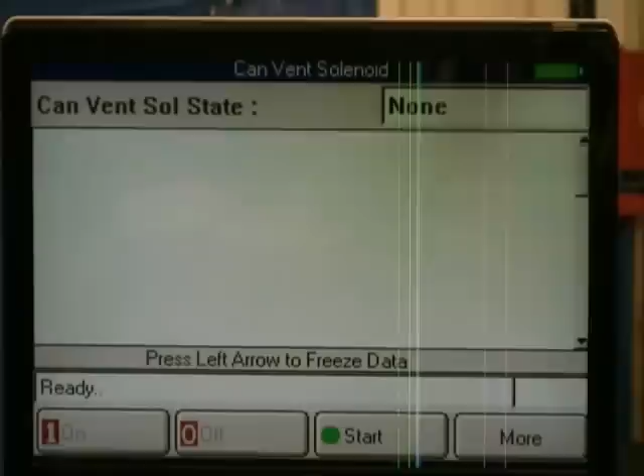Well, it did seem to steady out, so probably something small is getting back there. Let's see if it bounces back. Yep, so it ain't bouncing back yet. But that's one way to do it. So when we get out of this, I go into special test, and I go into EGR, EGR, I'm shot in the head. Evap, I'm sorry.

There's my, I can take this here, hit more, I can move this to the top. So now I can see my evap. I'll go down and look at the other evap stuff. And you guys just let me know when you're ready over there. Yeah, I'm just walking back up through the menu. Okay. And I have a question too when you're ready.

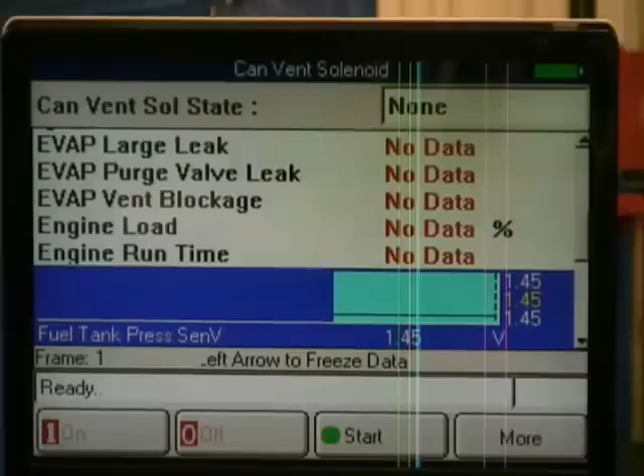Okay, I'm just going to move these two to the top to show you this is really the easiest way we can look at this and graph it out. With this particular tool, since I know it quite well, you can graph all this. Some tools don't give you that ability. And you always want to pick PIDs that are going to give you information on what you're testing. What do I care about engine speed, for argument's sake, or an O2 sensor? I'm not going to worry about that when I want to see if my purge solenoid is working, or the fuel tank pressure.

You guys better be ready now. That's all I got. Excuse me.

By the way, part of what Jerry was saying, I'm not near a microphone here. Part of what Jerry was saying is that if you pick up too many PIDs, what happens is you slow down the data transfer rate. It takes longer for you to update your information. If you only have like 3 PIDs like that, then you're going to have a much faster update rate.

Craig had a question. And the ones you're looking at, the other ones may not be important. They're not important. They're just slowing down the test. I apologize. Yeah. The question was?

We have 5 minutes. On what vehicles can you control both valves with the scan tool? Do you think it's a good idea to cycle the purge valve and or vent valve to listen if they are working correctly? Okay, so what vehicles can you cycle the purge and vent valves? On many, but again, dependent on your scan tool, dependent on the manufacturer. Do we think it's a good idea? Hell yeah, it's a real good idea.

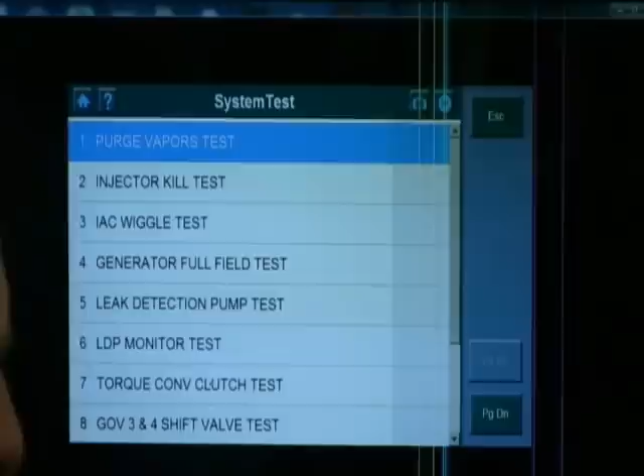Actually, what we're going to do is, we're limited on time here. I want to talk a little bit more about, we talked about zeroing the gauge. We did talk about the leak detection pump system. There's also another important system out there that's a natural vacuum leak detection. I'm afraid, guys, we're going to have to jump across the leak detection pump other than what we've already covered. So I apologize for that.

I don't know what the communication problem is, but, oh, we said it's live. It's live and stuff happens.

So anyway, this is a quick way to check the natural vacuum leak detection system. The quick trick here is to go in through your filler neck adapter, because this particular system does not have an EVAP service port. So you're either going to have to tee into the purge line or do a quick easy test here. And when you have your hand vacuum pump applied, we can actually draw a slight vacuum on the system, because the NVLD switch or the ESIM switch is going to close at a very slight vacuum.

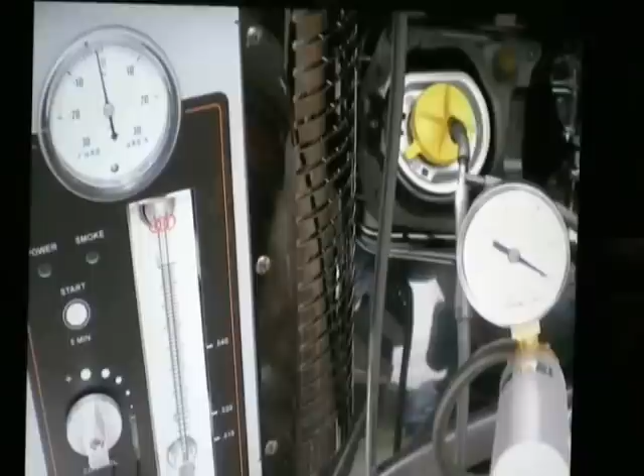So this is our connection, and as you can see, as we're pumping just a slight amount of vacuum on the system, it comes up real quickly. Let me go back here. Okay, so it's just a slight pump. This is inches of mercury, isn't it, on the hand vacuum pump? Yep. So right there, there we go.

Okay, so here's a hand vacuum pump, and this is millimeters of mercury vacuum on the inside scale and inches of mercury on the outside scale. But as you can see, when we pump vacuum up on this, it's going to go way over 1 inch of water column real quick. But because we're applying vacuum to the whole system, we can pump this up a few pumps before it starts applying vacuum. So when that happens, you can actually watch the switch position. In this case, it's open because it's not at 1 inch yet.

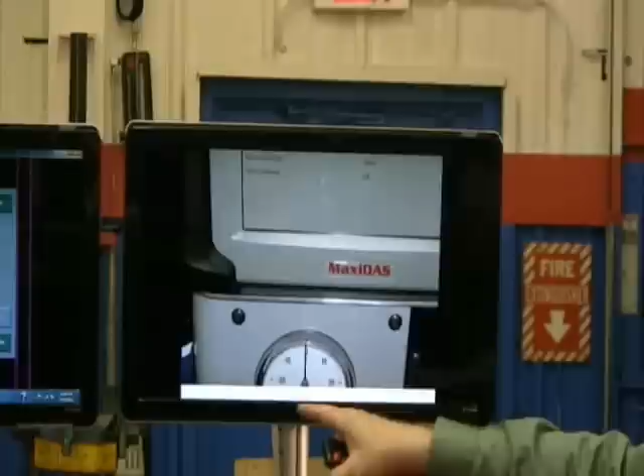Now this is again why we want to have our pressure gauge calibrated accurately. As I continue pumping up the vacuum, I see that as I approach 1 inch, it's going to go ahead and close the NVLD switch. Guys, this is the only way you can see if that switch is closing at the proper value. And again, look how critical this is. Exactly. And if yours is not adjustable, you can have an issue.

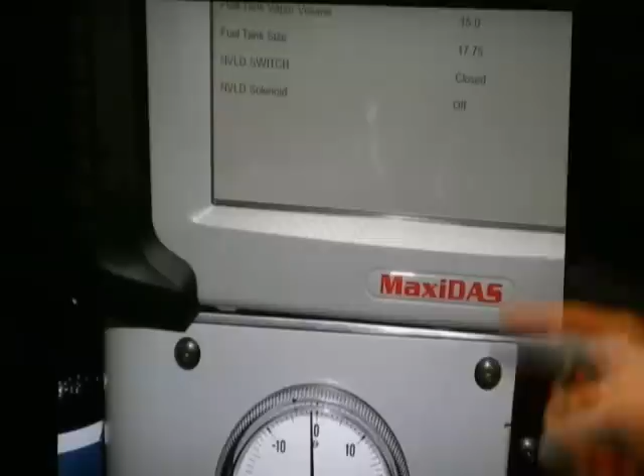Exactly right. And the quick trick here is using the two together. Now all of a sudden, I've got insight into the system that I don't normally have if I'm just looking at the scan tool or if I'm just using my smoke machine. Correct. If I use the two of them together, it's a great little quick trick.

Are we out of time? We got a couple more minutes? We've got to do one more drawing, huh? Okay. We could go overtime live. It's just not the YouTube. Right. Yeah. Okay, one more. Let's run this, we'll do the live.

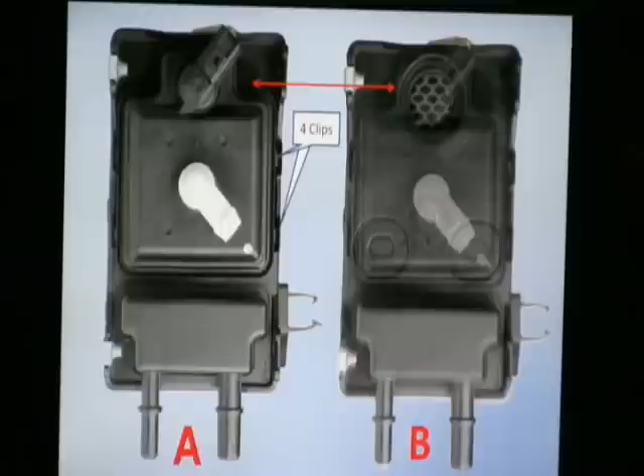Let's talk once more about the dye. We weren't able to show the dye because of the camera restrictions, but let me back up one slide. This is a Ford canister, and this one was an interesting one because, and I'll make this brief, when it was smoke tested, there was smoke coming out around this vent valve and this filter area. So the common thought would be, okay, I've got a vent valve that's not sealing, or this filter assembly has got to be replaced. So it was replaced, and lo and behold, here comes the customer back.

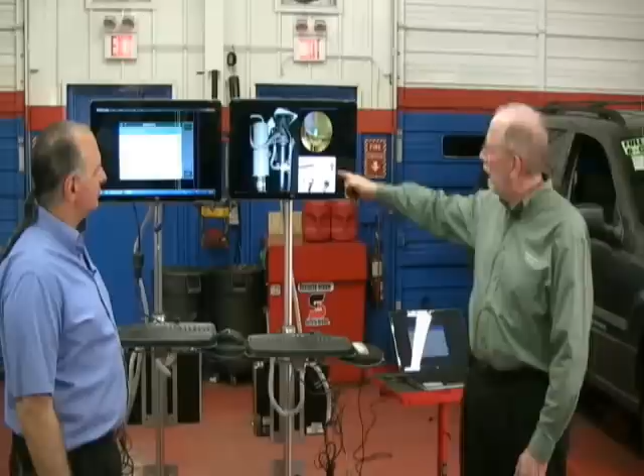Here's a Mitsubishi system, and this is where a borescope comes in handy sometimes, because this assembly is actually tucked up underneath between the fender and the, similar to the Hyundai setup here with that filter setup. Right, and this one was leaking, as you can see, right at the vapor separator canister, and picked up with the borescope with the UV light in it. We have one right there. What's the part? It's a Flex View 3591 OTC that has the, you can see the UV light.

Can you catch that? So, those of you that have the UV light, anything with a 405 nanometer spectrum will fluoresce the dye. So, some of your air conditioning lights will work. The scope lights like this will work. So, there's a few other examples. Some of them have UV, some of them are just borescopes that you can come in and look for smoke or whatever. But the key thing is, guys, use those tools as well.

We're a little bit over time now. Is there anything else that we want to cover before we wrap things up? Let's see. Did we do the last giveaway? No, we'll do that at the end.

Okay, we covered a lot in this hour and a half, but unfortunately, due to technical difficulties of scan tools and never mind the technical difficulty of my voice, we weren't able to cover everything. I'm sure we'll be covering this subject again in the future with more information. If you can give us some of your questions and your feedback, we'd appreciate it.